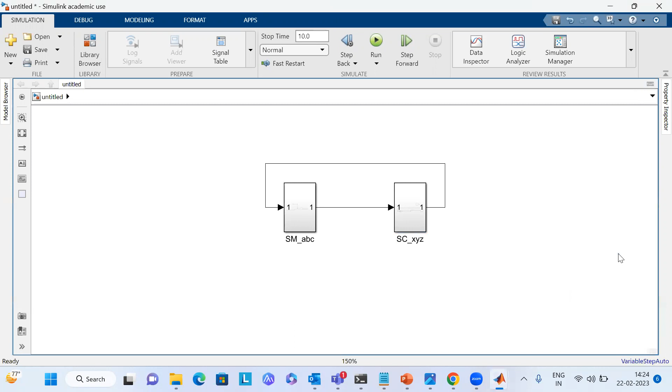After naming, we need to change our solver. Go to model, model setting. Type fixed step, and it should be like ODE4, depending on your model. So fixed step type, step size is 10e minus 6.

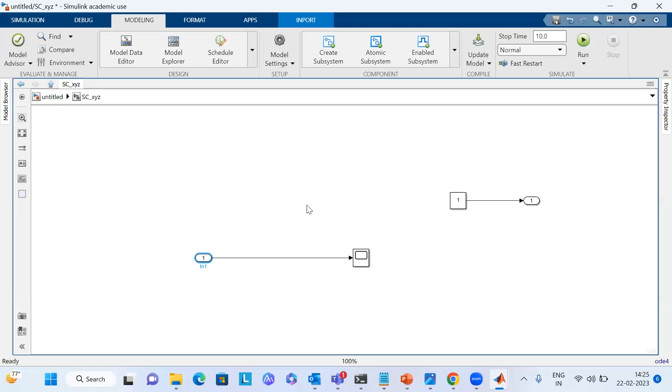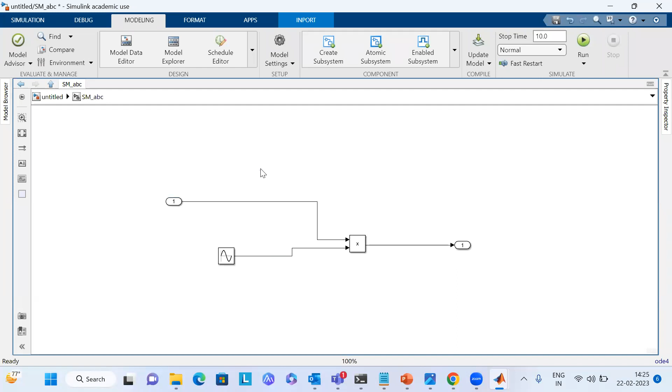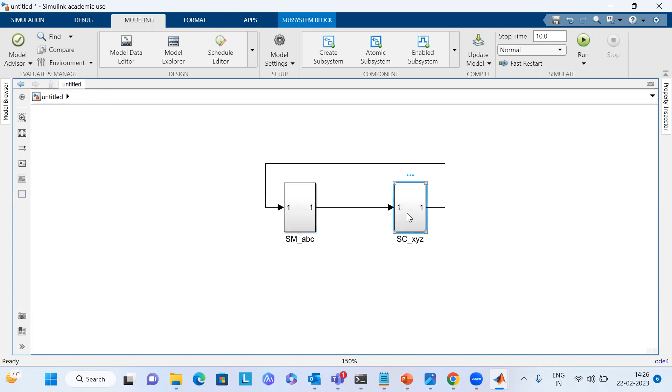Then the OpComm block should be placed always after input. Data is coming from SM to SC, then the OpComm block we need to place in SC. Data is coming from SC to SM, OpComm block we need to place in SM, here after input. Same OpComm block here will show your sampling time, and if placed in master console, it shows acquisition.

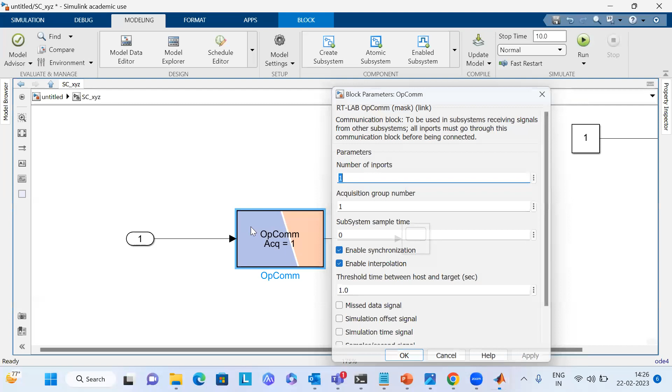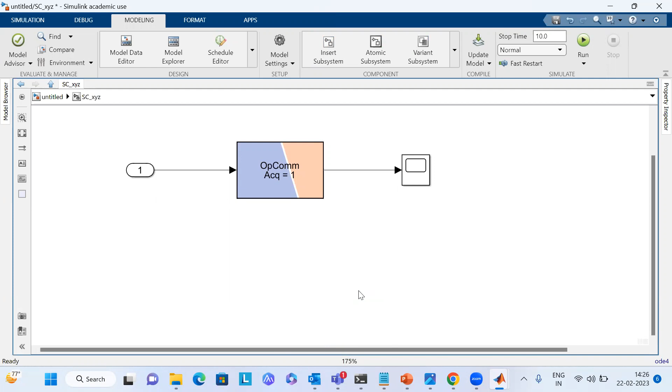This OpComm block's total number of inputs is 25. If your input exceeds 25, then you need to use another OpComm block. Here is your acquisition number 1, then you can use acquisition number 2. How many acquisitions can we use, sir? I'm not sure, actually you can go up to 256, like that type.

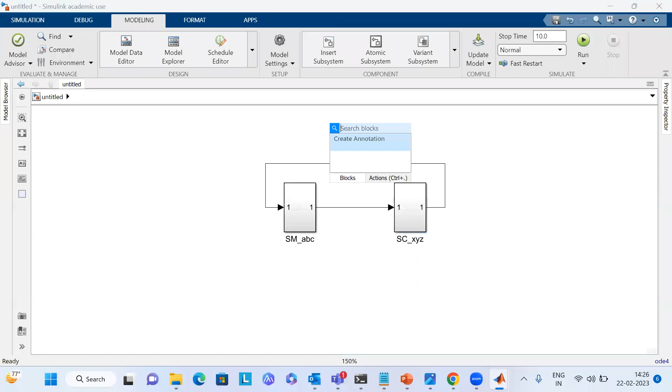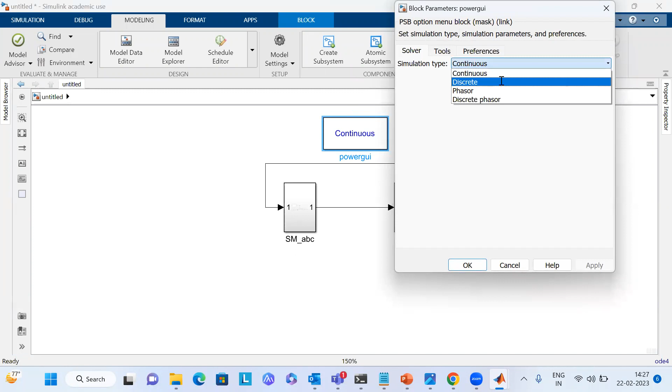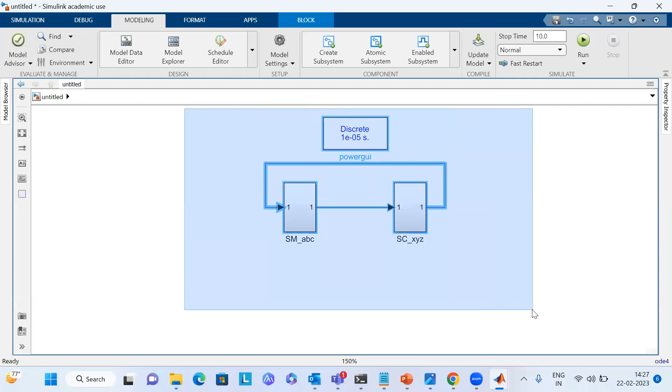So then powergui. Now this model is ready for software synchronization mode. First we need to save this model.

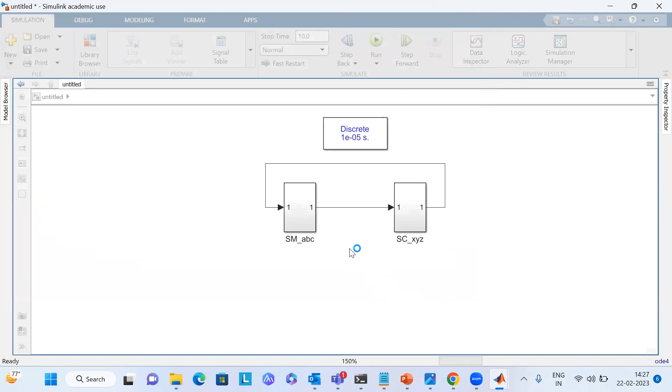Yeah, now your model is saved. First we need to close it. Then open RT-LAB.

Create a new project. That project name is OPJU_SINE. Next, empty, finish. Next is import your model.

Desktop, this Sine1. Your model is imported. Previously, we have added this demo model. Okay, after that, we'll see this demo model. Then I want to edit something in this model, so click on edit.

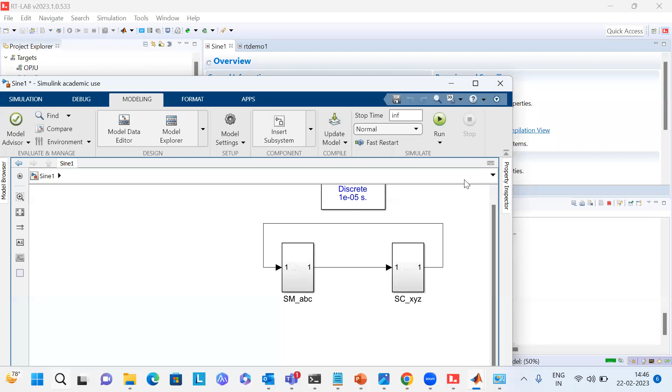Now a model is built and we need to load it before execution. At the time of loading, your console part will be open automatically, so whatever you want to change at the time of execution, you can change it here. So next is your execute.

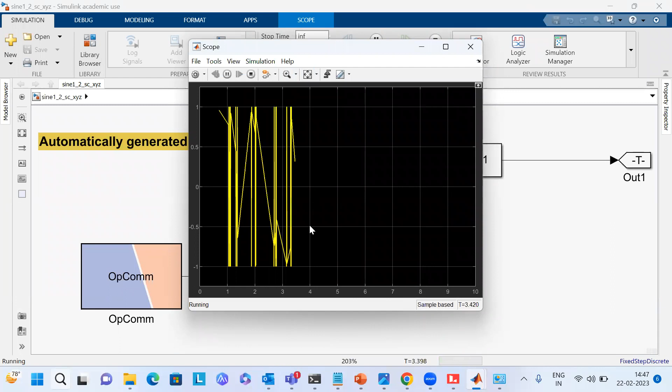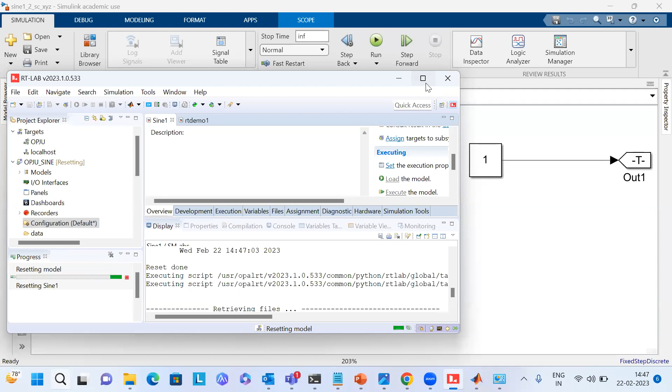You didn't get exact sine wave result because some data loss occurs communicating between your host PC and your target. To reduce this data loss, we have need to increase that sampling time. After building, you have need to change this sampling time. Go to this probe control.

Sir, could you please magnify the image because someone is saying video is not visible? Which video? My screen is not visible. Yes sir, the screen is not visible to some participants. We could see the screen, I think it is a problem from the participants' end. It's a problem with all students, yeah, only for some participants. No sir, we can see your screen. Maybe it is the issue with internet connection. Sir, I suggest whatever changes you are doing, just read out, like 100 changed to 1000, so that they can understand it. Okay, this one, no? Yes sir, I think this one already open. What are the changes you're making? Just read it sir, so it will be understood by others. Okay, okay, thank you sir.

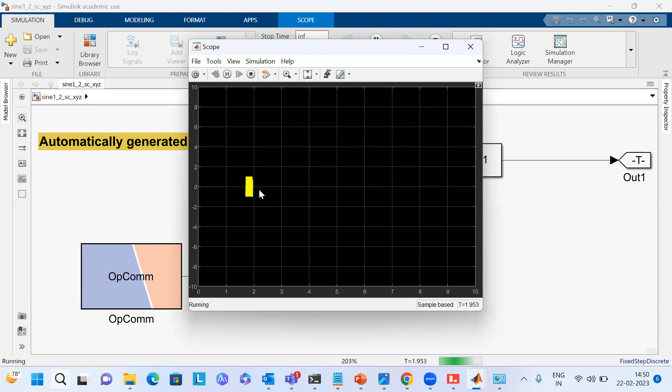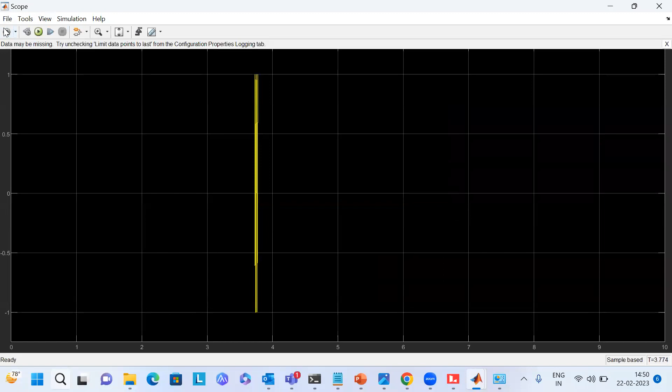So I want to zoom out this result. Yeah, now your result is coming.

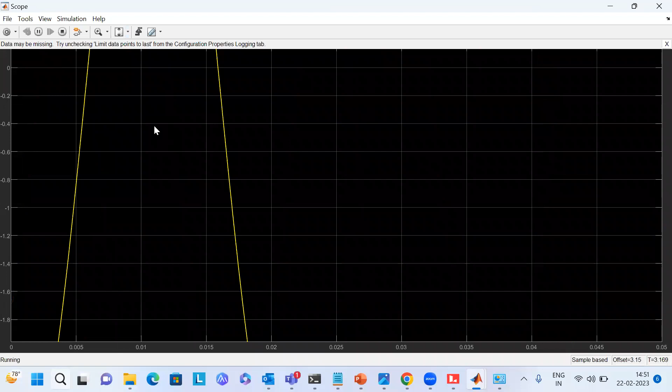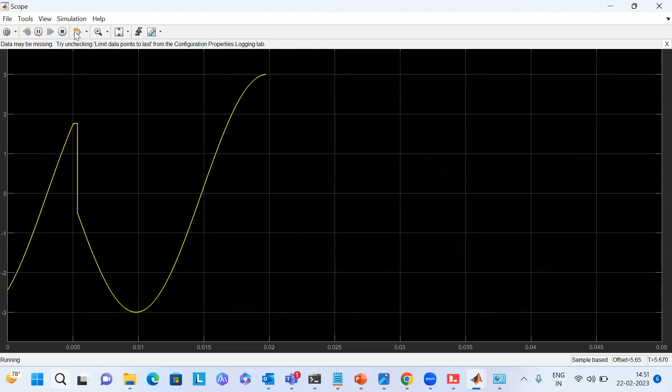So I want to change this PWM, sorry, constant value 1, 2, 3. That means your amplitude should be 3, maximum should be 3. But here, yeah, now your amplitude is three. Here is one feature, you can change it online. This type is coming due to the data loss communication between your host PC and a real-time simulator. If you want to see this result in DSO, you can get exactly same result. Okay, this is your software synchronization.

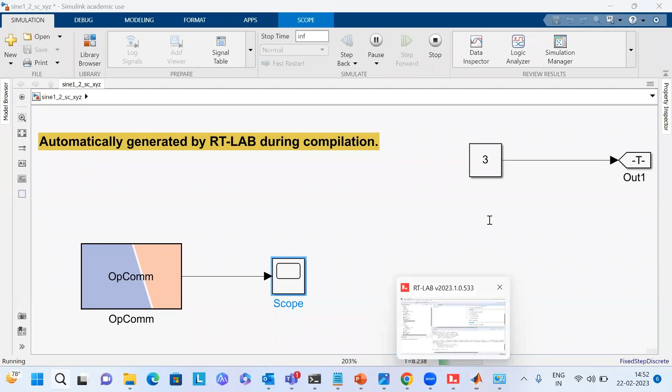Then we'll go forward for hardware synchronization mode. At that time, we'll use that OpWriteFile block, which will be saved in your workspace. Then after that, we'll plot that graph. Okay, any question? Then we'll proceed for hardware synchronization mode.

Sir, in the probe control, you have changed samples, is it only with respect to scope or the total system sampling time? Only with respect to that console part. Console, okay. Okay sir, thank you. Then we'll go forward for hardware synchronization mode.

Again, any question? Okay, then we'll go for hardware synchronization mode, and this is the main important part. Same model, edit again.

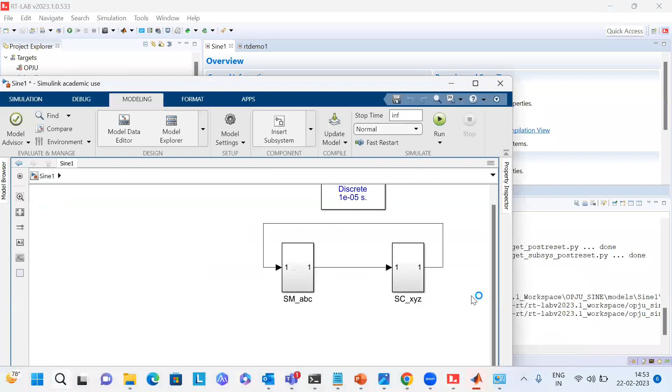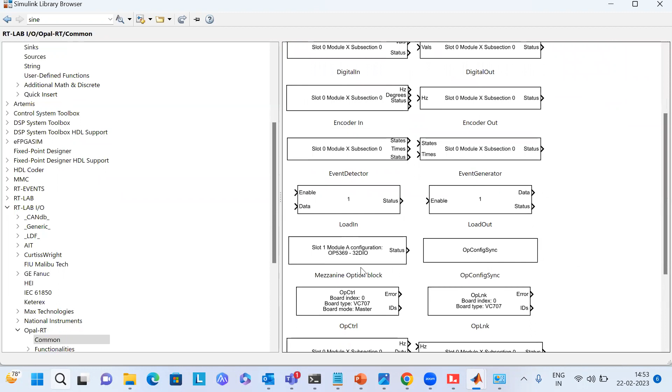One of the participants is asking how to connect Ethernet. Just a minute, I'll show you on phone. First, I need to connect with my mobile, after that I'll show you.

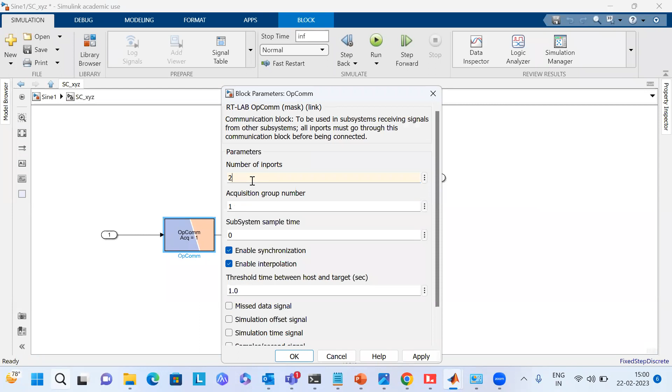So here the input is 1. If you want to change it, the number of input is 2. Apply.

Okay, this is your analog input. Whatever we take in analog in, we'll see in this scope.

For this, a bitstream file is required. Here is one question: where is that bitstream file? How can we find that bitstream file? For this, we need to...

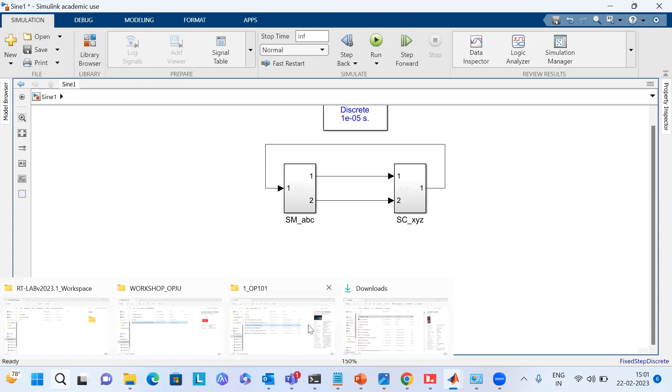go to system description. In system description, you will get your bitstream file, like this. For this system description, not for this simulator, let's say one university I am taking it for a demo, and like this your bitstream file is mentioned in this.

So where is the bitstream file available? First we need to go to C, then OPAL-RT eFPGAsim, then this version. I'm using this version, common. This one, and here is your bitstream file, all bitstream files.

Then how do you know your board type? TE0741, yeah, VC707. How to know your board type? For this case, you need to right click on this.

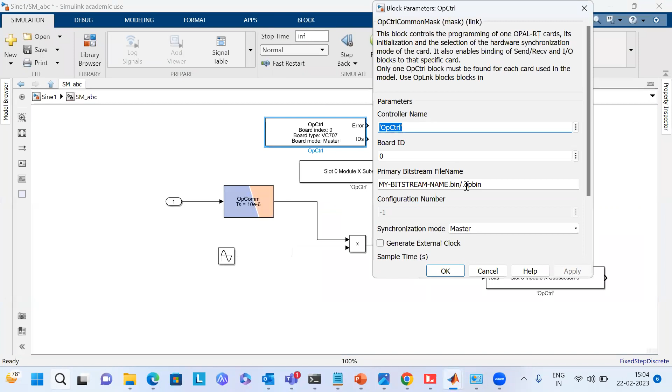You need to open the .conf file, and just rename it, copy this name, paste it in this. And board type is TE0741.

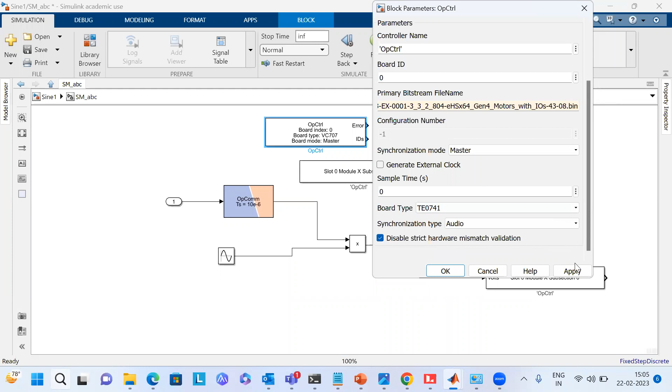And you always need to click disable strict hardware mismatch validation, apply. Then we need to map this analog output, analog input.

Again, go to this file. Where is that analog output? For analog output, data input number is 21, not this one, 23. This one is your data input number 21.

This is your analog out. Data input number is 21.

Before that, it's showing slot 0 module X subsection 0. After putting this value and applying, it's showing slot 2 module B subsection 1. Then you can easily get it from your analog out. It will come from which module, which slot.

And the number of output channels is 1. If your signal is like 3, then you need the number of A out channels to be 3. And same for analog input.

Data out port number is 3, this one. Now it's showing slot 2, module A, subsection 1. And your number of input is 1.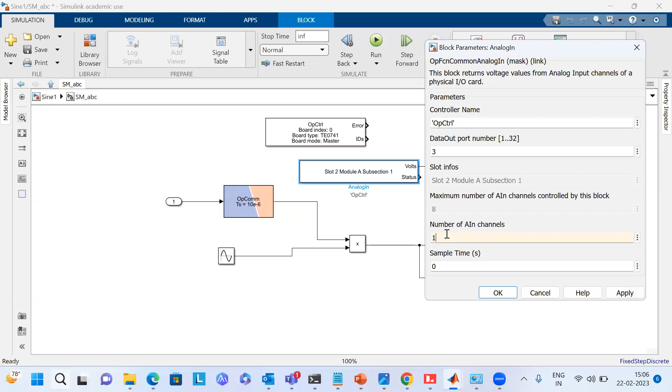Now we need to verify our model offline. Is it running or not? Now it's running.

Then now we are using our IO card, so this software synchronized mode should be changed to hardware synchronized mode.

After changing something in our model, we need to build it. Sometimes, wait.

Sir, before building, can you add that option for how to send the data to workspace so that we can plot it in MATLAB? No, after this I will tell you that, okay. Yeah, after that I will tell you, in the same model I will tell you. Okay, sir.

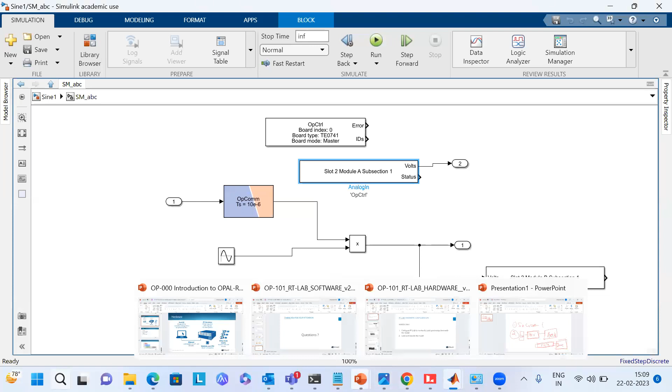For analog out, we'll get it from 2B. In your model, your analog out is 2B subsection 1, so you will get it from 2B. Subsection 1 means 0 to 8. And your analog input is 2A subsection 1, so you will get it from 2A. So for this, we need to loop back.

I am using this type of loopback cable. I think in your institute you have an FRC cable, white color loopback cable, so you can use that. Now I am connecting loopback from 2B to 2A.

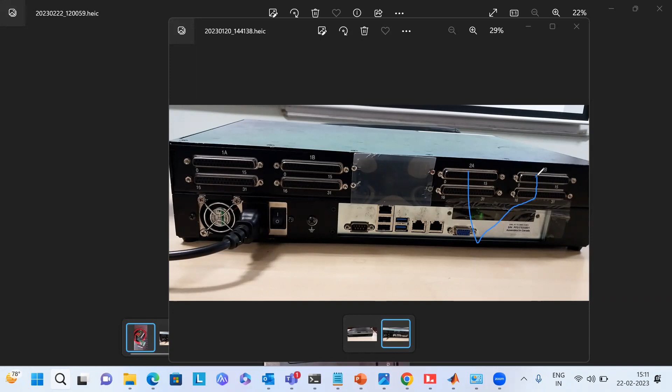This 2A to 2B, I'm connecting on the backside of the real-time simulator. Also, you can use this screw terminal. You can see your result in analog out, and you can take your result in your DSO.

So now our model is built. Next is to load our model. Now our model is loaded. Then execute it.

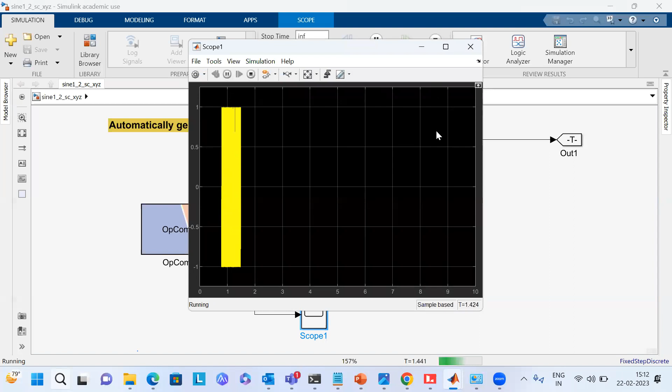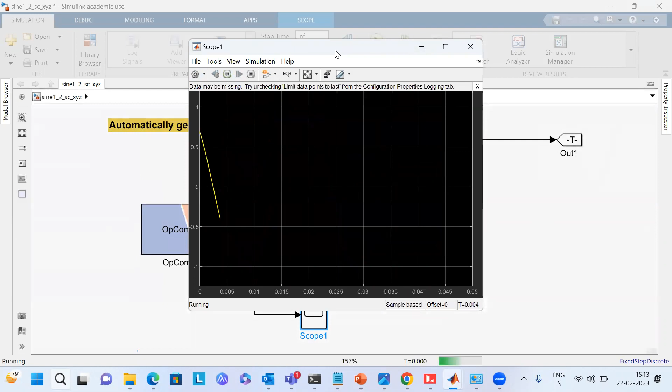This is your analog input result, which we'll take from that loopback cable. Now I open that loopback cable — your result is 0. So again I connect this loopback cable.

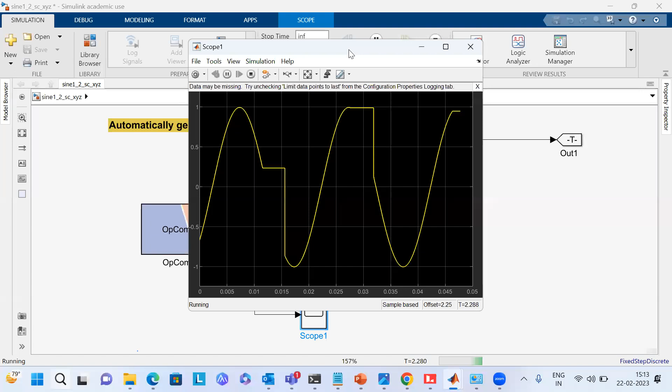So I want to change this value, that means the amplitude, to 3. You can see that the amplitude is changed.

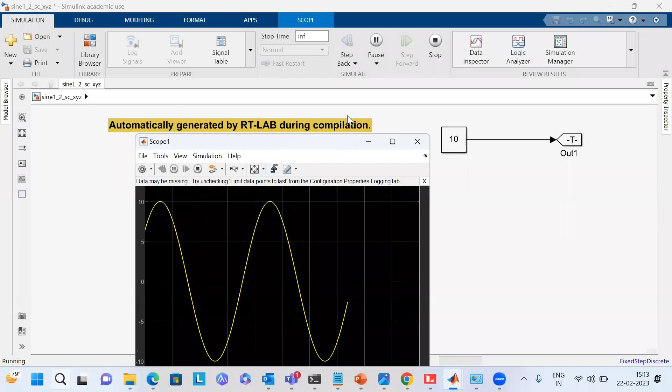So I want to change it again to 10. You can see that amplitude is 10. For analog output, the maximum value is 16. If I give a maximum value like 18, above 16 it will be clipped.

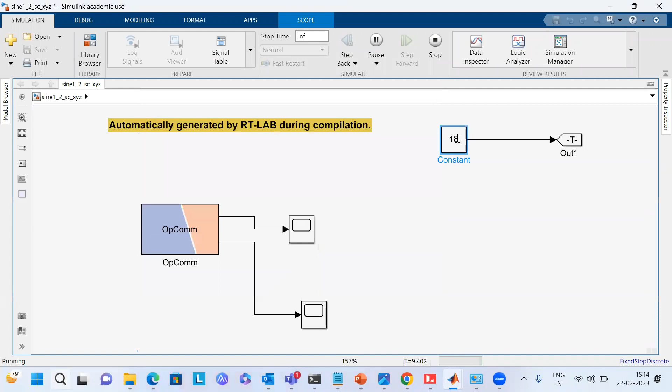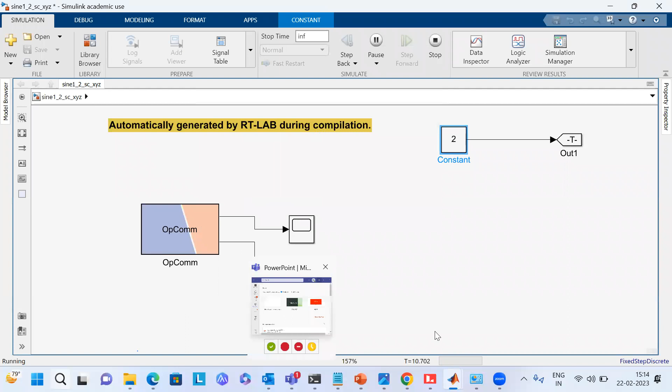This is one option to change this amplitude. Another option, if I want to change the sine wave frequency, I need to go to our model, the sine block.

This sine wave — I want to change some parameters of it. I can change it from here. Now the frequency is 314. I want to change it to 628. See, the frequency is changed.

Again, I want to change it to 1200 — that means it will come approximately 200, 190, like that. See, your frequency is changed. Now if frequency is like 0, it will come as a DC signal.

So this feature means you can change parameters at the time of execution — whatever you want, you can change it. Suppose I want to change this frequency value to 500 radians per second, and I want to save this value. Then you need to click this one, save parameter.

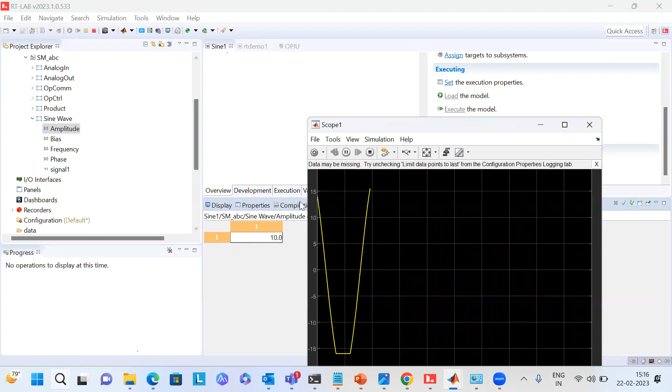Suppose you have PID control, you can change that PID value at the time of running, at the time of execution. So I have changed that amplitude — it's clipping because there is a multiplication factor of 2, and here your amplitude is 10. That's why it's clipping.

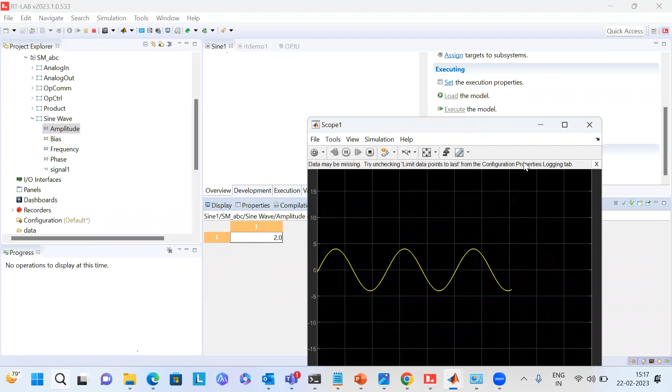Now it's coming perfectly. This is your hardware synchronization mode, and this is the process of how to use that IO card — analog out, analog in, digital out, digital in. We'll use the same procedure for digital out, digital in card. Then next is your reset.

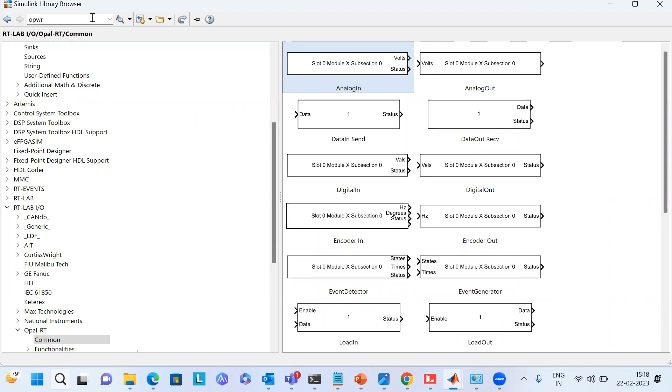Now I want to see this result in .mat format. So I need to edit our model SM, then we need the OpWriteFile block — this block.

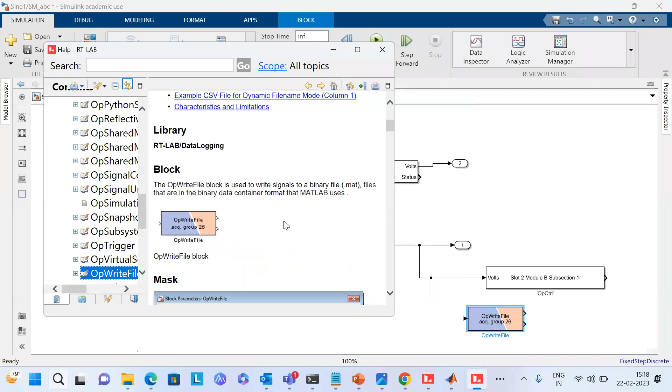Here is a calculation for how to choose this value. I'll show you how to calculate it. Right click on your model block, go to help. You can see the block description here, how to calculate that value — the buffer size should be like that, and a file size. So you can calculate here, but now I'm placing it randomly.

Again, we need to build it after changing our model.

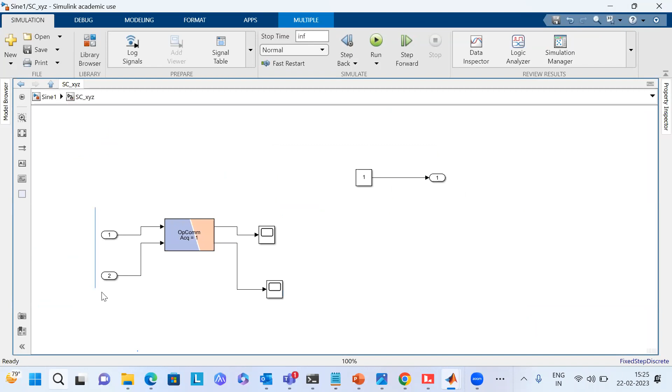Yes, it will always be connected after your input. See, in the master part, it's connected after input.

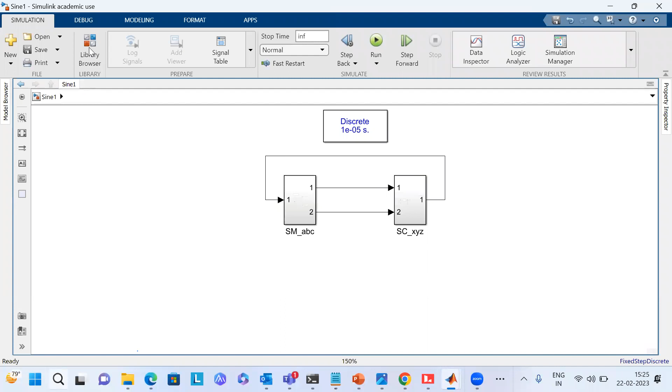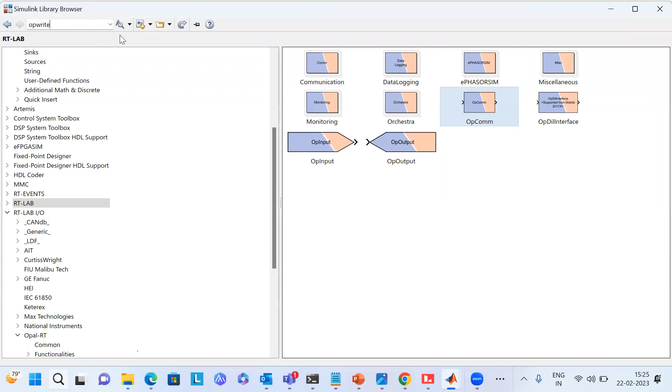Can you show that opwrite block one more time? Opwrite block, yes. Inside the model, what things do we have to do? Simple—if you have two results, okay.

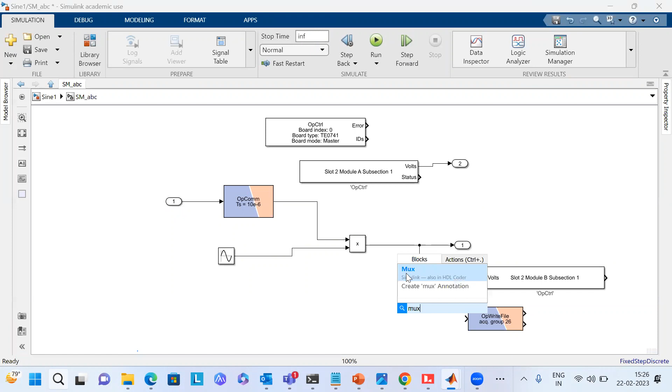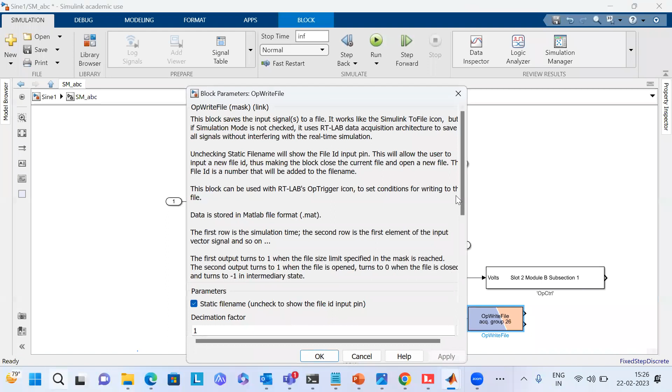Suppose if you have two results, I'm not changing this model, but suppose if you have two results, like 1, 2, you will give these two results. Just input that opwrite block, and there is a calculation part for how to choose the file size limit, number of samples per signal, and buffer size in bytes. I have taken it randomly, but you can calculate it according to this formula.

Then no more questions there, so you can proceed. Sir, I have one question. Yes. So here, we talked about the sine waveform generation. We are changing the amplitude and frequency by selecting the options, right?

Do we have any facility to change that frequency as an external parameter from another block live, like frequency, amplitude?

Question is, for example, we have another block—there may be a multiplier block, and there is an output of that multiplier. If that output can be connected to this frequency, and the frequency can be changed on the fly, what's your model?

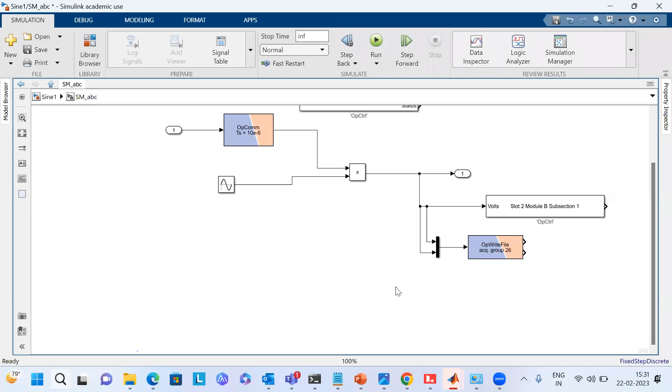Yeah, when it's running in real time, you can see all data using this mux. Suppose your signal is like 10, 14, you can use this type of mux. It means every system variable has to be given to the OPWRITE file? Yes, only using that OPWRITE file.

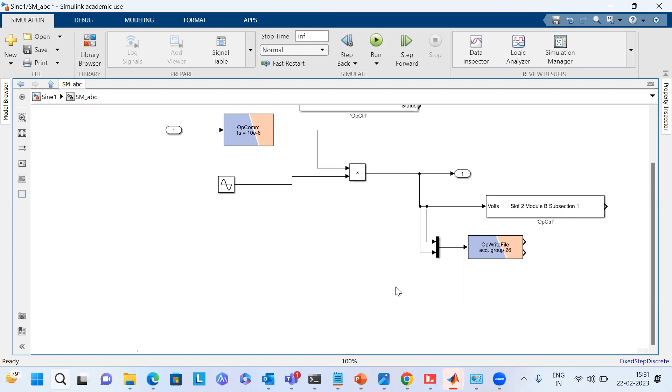Okay, so this data will be saved, but anyhow you are going to show now where it will be saved in the workspace. Okay, now we go to execute our model.

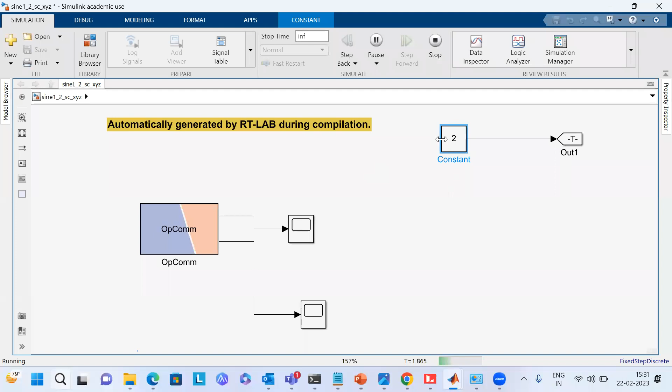Console part is automatically open. I want to change this value like 2, and see if it is stored in the OPWRITE file or not, like 4, like again 1. Okay, we are changing some values, and after reset you will get that .mat file. Reset our model.

To see where it will be available, we need to go to our Sine1 SM_abc, RedHawk, my file, and OPVAR. You can change your file name depending on your preference. Here the file name is OPVAR, sorry, my file.mat, and the variable name is OPVAR. You can change it according to your preference.

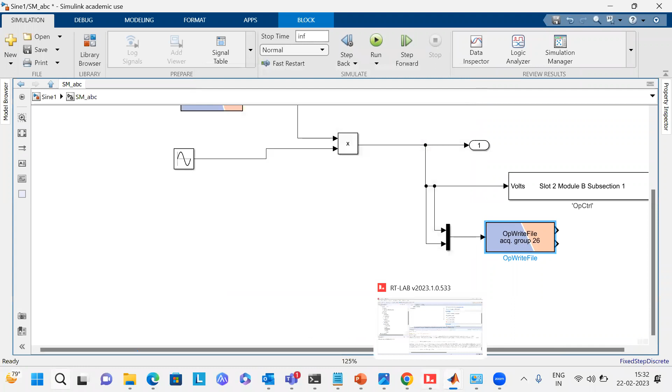So next is your OpWriteFile, and we need to plot it. Actually, I have forgotten this code, how to plot this one. Does anyone know? Please remind me how to plot. Otherwise, I need to search in Google.

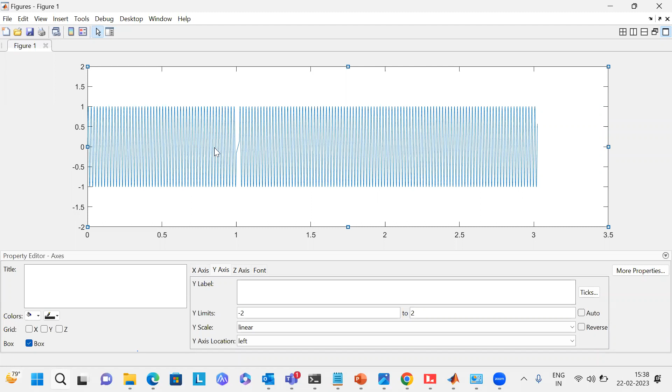Okay, this... yeah, this is your sine wave. You can store this type and you can plot it like this. This means this is your first row, all columns, and the second row, all columns of OPVAR.

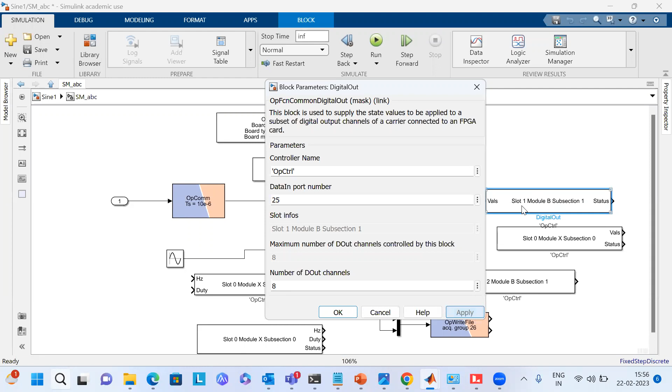Data input number is 22, 23, 24, 25. That means in digital card, total number of channels is 32. In each section, it's 8 channels. So if I place 22, your digital out will come in slot 1, module B, subsection 4. If I place 25, it will come in slot 1, module B, subsection 1. According to that, you can use 32 digital out.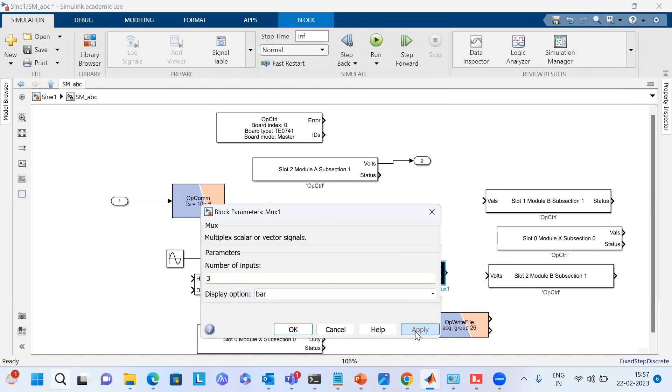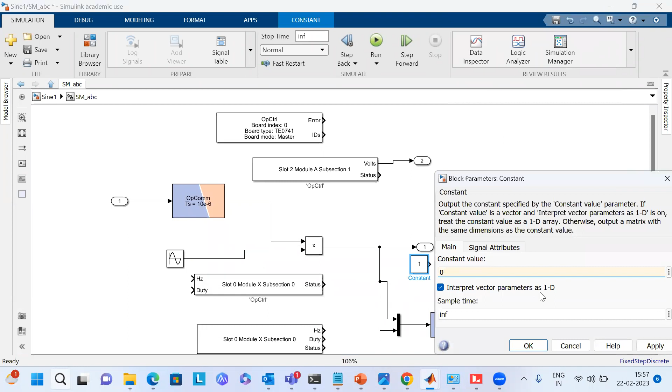Suppose in analog out, if you want to use a particular channel number, say channel number 3, how to use it? It's a simple concept. Use like this. Channel number 3, and connect one constant here. Now you will get your result in channel number 3. Here the number of output channel is 3. You will not get your result in channel number 1, you will get it in channel number 3.

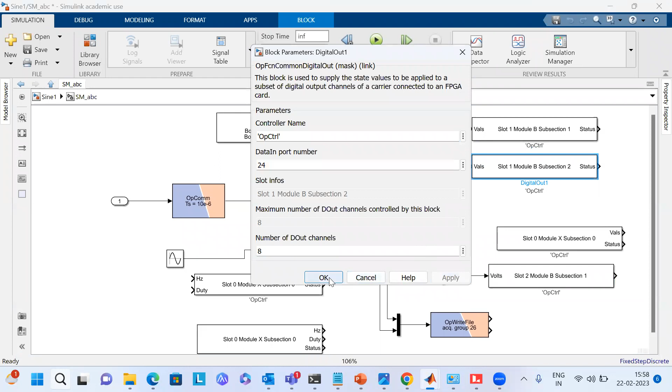Same in digital out, you can use 8. So at a time you can use 32 channels, it's for 8, it's for 8. Each block's data input number should be different because one will come in 1B subsection 1 and another will come in 1B subsection 2. Same for digital in.

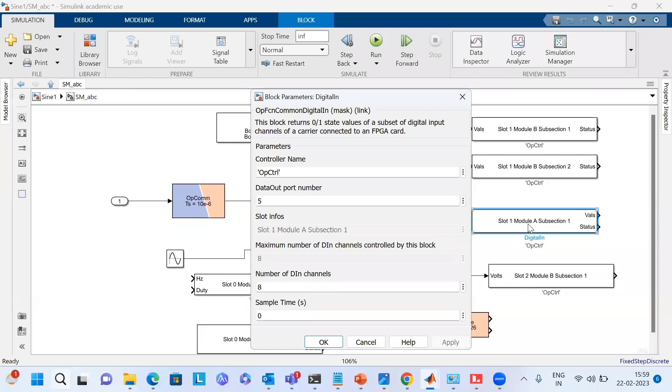For digital in, what is the data in? 5, 4, 5, 6, 7, 8. If 5, then you will get your digital output from slot 1, module A, subsection 1, and you can take this digital out. This is the digital in. Suppose in your hardware in loop model, then your inverter is in your simulator, and you can generate some PWM from outside, give it in slot 1 module A subsection 1, and validate your model in HIL mode. At that time you use this block.

Next is your PWM, and this is your PWM out. Suppose outside there's one buck converter, and you want to generate pulse width modulation according to frequency and duty. You just connect one constant here, and another constant there. Like switching frequency, say 5 kilohertz, and your duty ratio is 0.5. According to that, your PWM will be generated.

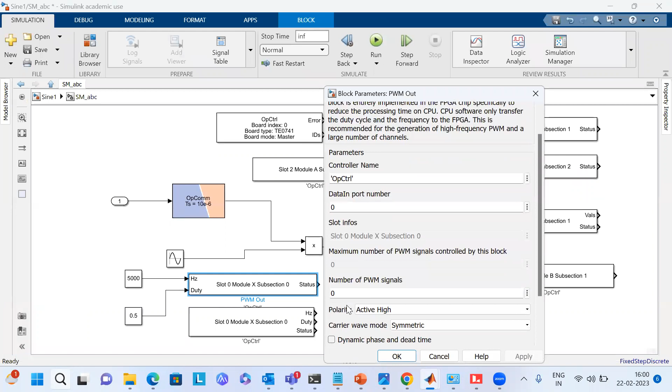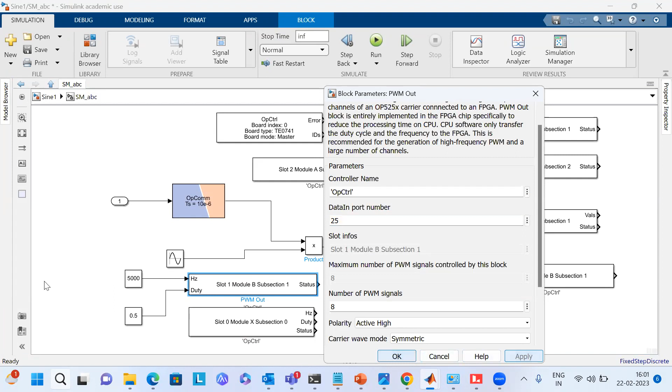Data in number 25 for PWM, you will get in 1B subsection 1, data in number 25. This is your data in number 25, then you will get PWM according to this. So here you have no need to design a model to generate PWM, you can generate it and give it to your real inverter.

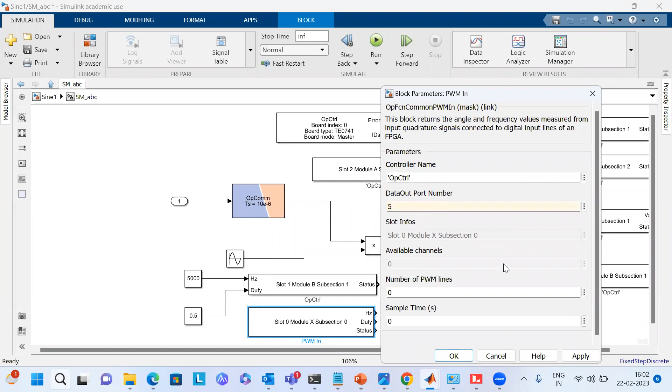Same for PWM input. Data input number, suppose 5, then you will take it from slot 1 module A subsection 1. Okay, so...

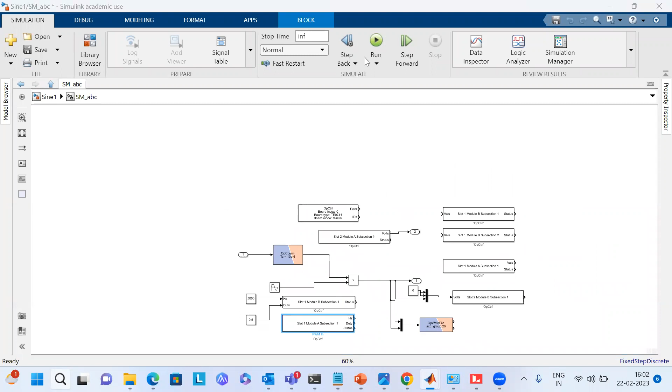How to make hardware in loop? Main concept: this is your real-time simulator. Suppose an inverter, that inverter output is voltage and current, and this is your controller. It will take this voltage and current as a controller signal, and your controller will generate PWM, and give this PWM to your inverter. This is your real-time simulator, and this is your real controller. This is your analog output, and this is your digital in. You can use it and validate your model in hardware in loop.

The second one, how to use in RCP. In RCP, this is your controller, and this is your main model, real model, hardware, suppose inverter. This inverter's voltage and current will be given to that controller, it will generate PWM and give PWM to inverter. This is the real-time platform. So in this case, this real-time inverter's voltage and current is high.

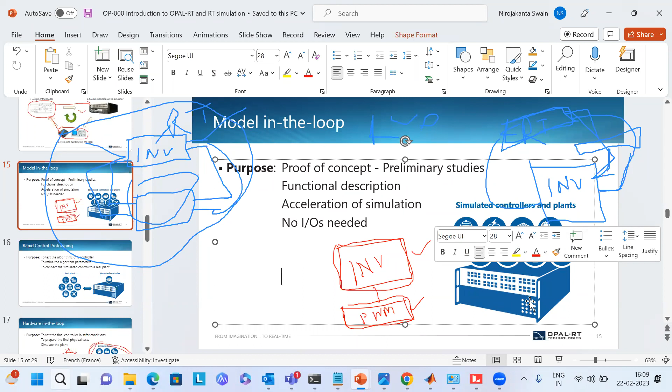And the second one is RCP. In this case, your plant is real. Suppose your inverter is real, but you are generating PWM from the real-time simulator, so it behaves like a controller. So in this case we call it rapid control prototyping.

And this is your hardware in loop. In this case your controller is real, but your inverter is simulated. That means your inverter control input is PWM, and you can use that digital in card to give this PWM to your plant. So that's what we call hardware in loop. Okay.

Another one is your power hardware in loop. In your analog output, maximum output voltage is plus minus 16, so that's why we use a power amplifier. In this case, your grid is simulated, but we can interface your simulated grid with a real microgrid using this power amplifier. That's what we call power hardware in loop.